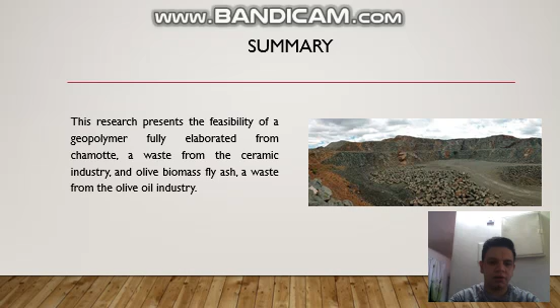Introduction. The amount of industrial waste is growing every year due to the excessive use of energy and natural resources. The recycling of industrial byproducts has become an inevitable necessity to ensure the protection of the environment, natural resources, and sustainable construction industries such as ceramics and cement manufacturing.

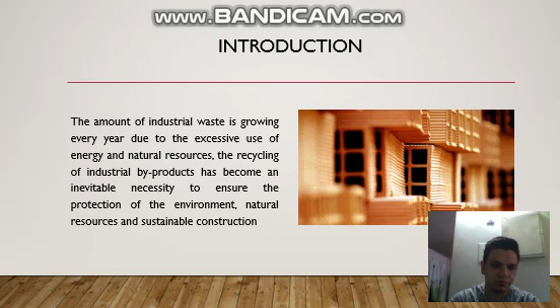Raw materials. The energy stored in biomass can be released to generate electricity through thermal combustion of biomass. Biomass combustion is a low-cost means of reducing GHG emissions and reducing air pollutants in existing power plants.

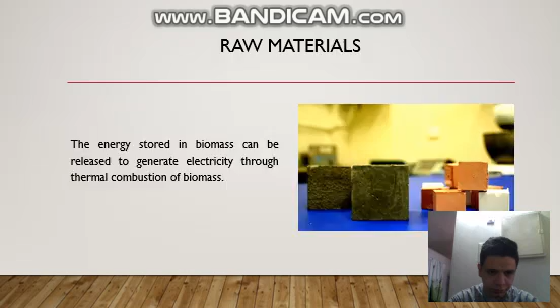The problems. The principal problem is cement manufacturing is highly polluting due to the large amount of greenhouse gases that are emitted into the atmosphere.

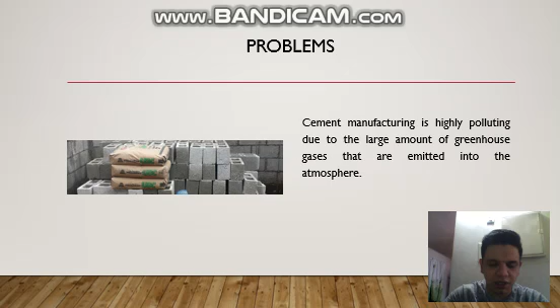Characterization of the raw materials. The percentage of carbon, hydrogen, nitrogen, and sulfur were determined using a commercial CHNS analyzer based on a dry combustion method for the analysis of organic substance.

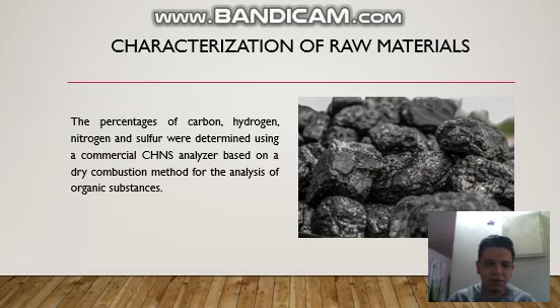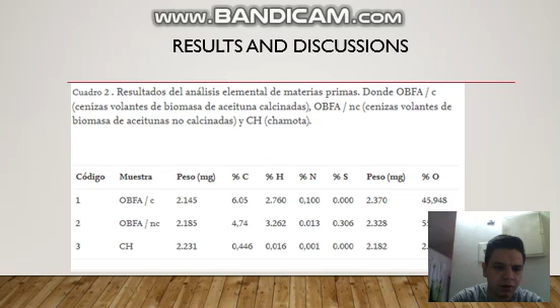The elemental chemical composition of the raw materials, chamotte and OBFA, was determined by micro X-ray fluorescence using a high performance micro XRF spectrometer. These are some results of this laboratory, and the results and discussion were explained in paper number 1 of this article. The X-ray fluorescence, the same.

And here we have the pH determination. The pH value was calculated for the OBFA NC sample as well as for OBFA C at 900 degrees. The pH value plays a paramount role since it is necessary for the alkaline solution to have a pH value above 12 to ensure the geopolymerization process.

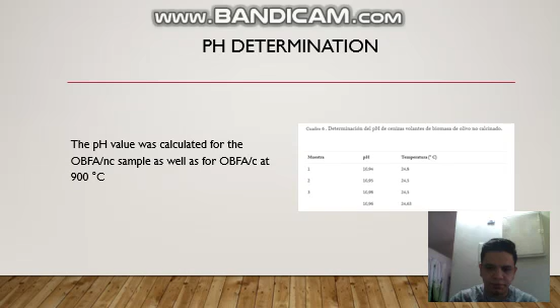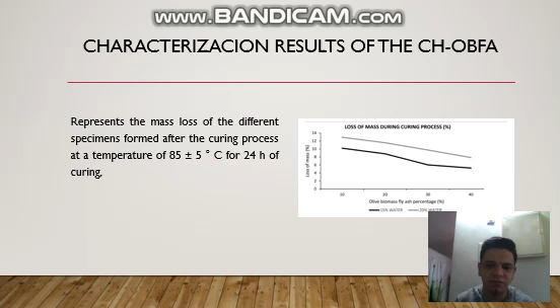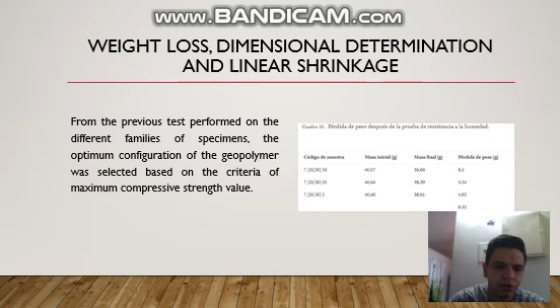Characterization results of the CH-OBFA represent the mass loss of the different specimens formed after the curing process at a temperature of 85 plus or minus 5 degrees for 24 hours. Weight loss, dimensional determination, and linear shrinkage from the previous tests performed on the different families of specimens. The optimum configuration of the geopolymer was selected based on the criteria of maximum compressive strength value.

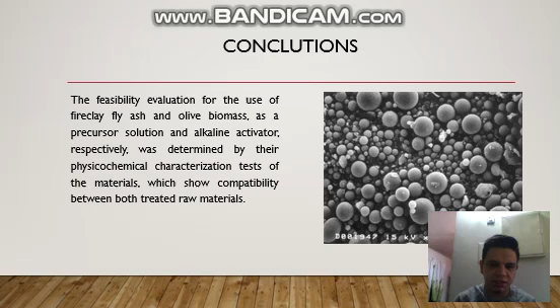And the conclusions: the feasibility evaluation for the use of fired clay and olive biomass fly ash as a precursor and alkaline activator, respectively, was determined by the physicochemical characterization tests of the materials, which show compatibility between both treated raw materials. And the bibliography is the same as the first paper, that is, the article.